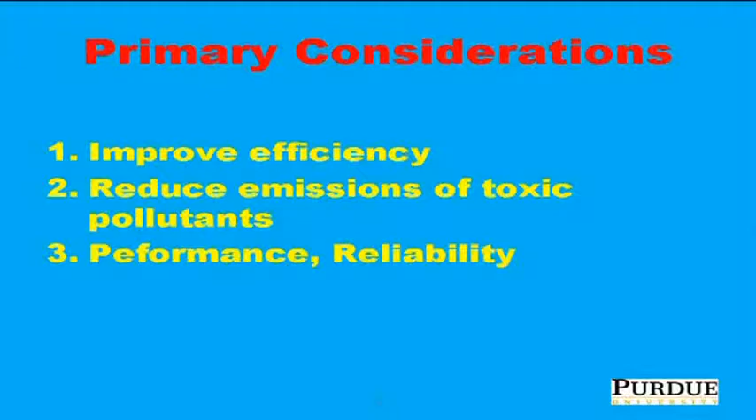So that question was in my mind as I formulated the presentation. It's going to change the tone a bit from what we have probably just heard. So when we design engines, the primary considerations obviously are to improve efficiency, reduce emissions of toxic pollutants, and of course maintain or improve performance and reliability. This we know.

Now, if I look at the range of engines we are interested in, that we employ for different applications, we can broadly classify them into spark ignition and compression ignition engines. And if I then look at the injectors and injection systems in these engines, I can classify them into low pressure, mid pressure, and high pressure.

So what I call low pressure would be, for example, port fuel injection, also multi-point fuel injection — they are the same thing. This is referring to a single cylinder, this is multiple cylinders. So this is typically what we have in our automotive car engines that we drive around.

Okay, low pressure. Mid pressure would be direct injection spark ignition engines. I will give you some pressure ranges in a few minutes as I go along. But mid pressure would be as those employed in direct injection spark ignition engines. They are not very common, but becoming perhaps more common in some operating regimes of automotive applications.

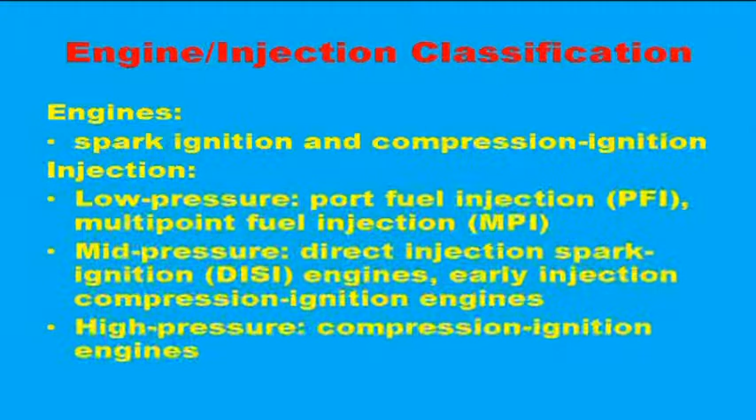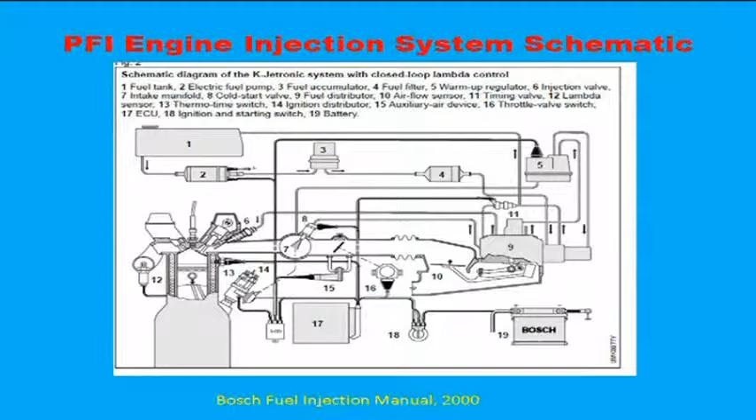The injection typically occurs when the valve is closed. So it is not as if it's spraying into the chamber directly — you spray typically when this is closed, and you wet the surface. Then the valve opens, airstream comes in, and so the process continues. What happens then is...

So when you inject, there is atomization occurring. There is probably secondary atomization occurring. But essentially, it wets these walls and wets the back of the valve. And when the valve opens and you have this airflow, probably there are different mechanisms that take place.

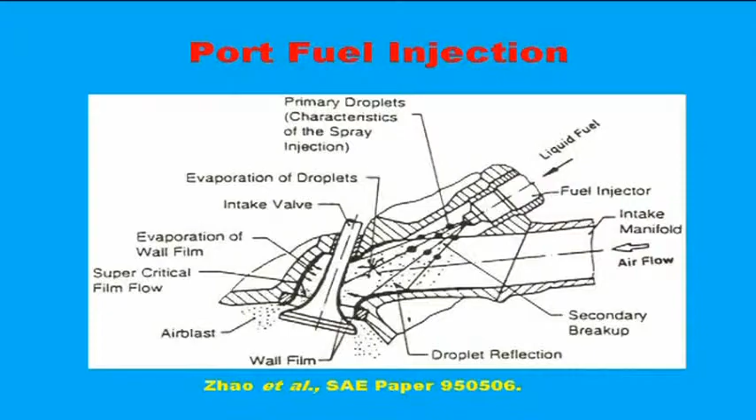One obviously is that it tends to vaporize if the engine is warm enough. If it's not warm enough, or even if it is warm, this airflow can actually strip droplets, and so you will have a mixture of vapor as well as drops that come into the chamber. That's how the port fuel injection works.

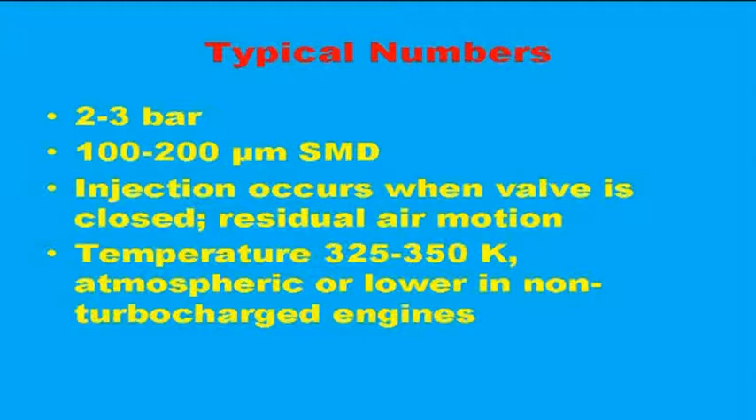Typical injection pressures for these are low pressure, 2 to 3 bar. If you measure the mean diameter of sprays from these kinds of injectors, they are typically reported to be 100 to 200 micron.

Injection occurs when the valve is closed. There might be just some residual air motion in the intake port at that time. The temperatures are typically 325 to 350 Kelvin, unless it's just the cold start period for the first couple of minutes. And the pressure in the port is, of course, atmospheric or lower in non-turbocharged engines.

The reason why you would employ port fuel injection is it allows you to give more accurate fuel metering. Because the injector is located closer to the engine as opposed to a carbureted engine where the fuel was introduced much further upstream, there is faster response.

You have improved volumetric efficiency because of the cooling in the intake port, and less vapor which actually displaces the air. Less cylinder to cylinder variation because each cylinder has its own port injection, and easier to adapt to alternative fuels.

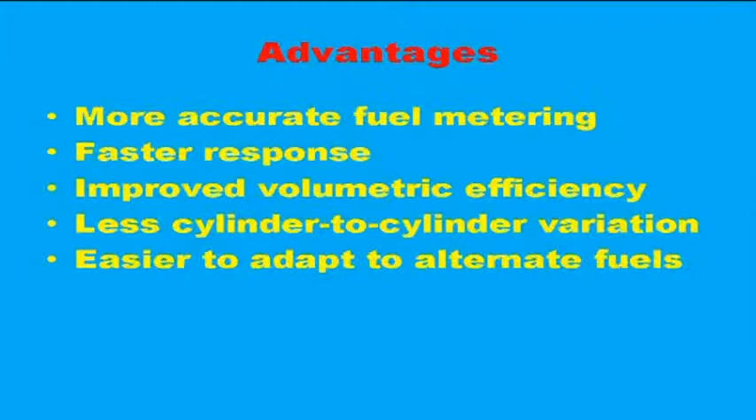Now note that in the case of port fuel injection, studying the atomization process of port fuel injectors is interesting, but not probably very useful. Those engines function well, but it's not a very useful effort. A presentation like this obviously has my opinions mixed in, and I will express those opinions.

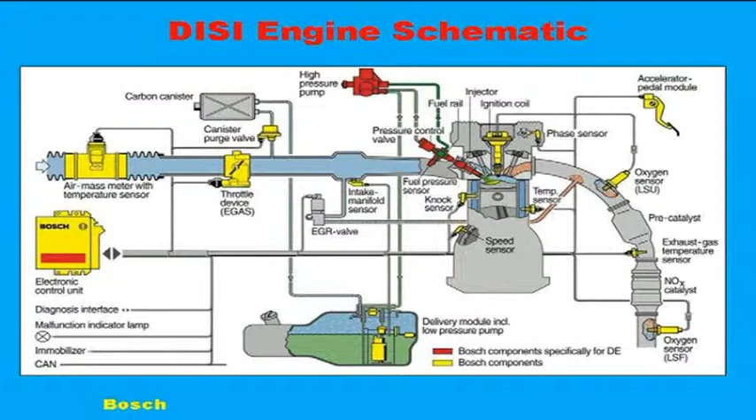In the case of the direct injection engine, whenever you hear the term direct injection, it's injecting directly into the cylinder. You have an injector which injects directly into the cylinder. That's just this part here. You can ignore the rest of it.

There are different ways of doing this. You can have an injector located here, which essentially sprays, and then the piston might have a contoured surface which allows the spray to turn around, and it then encounters the spark plug, which ignites the mixture, and it is burnt.

This spray is essentially guided to its position by the wall. You can also have the spray guided to its position by air motion within the cylinder, for example swirl. So then you would call it an air-guided system.

And you can have a spray-guided system where you can have an injector with, say, multiple holes, just as an example, and one of them might be directed right to the spark plug.

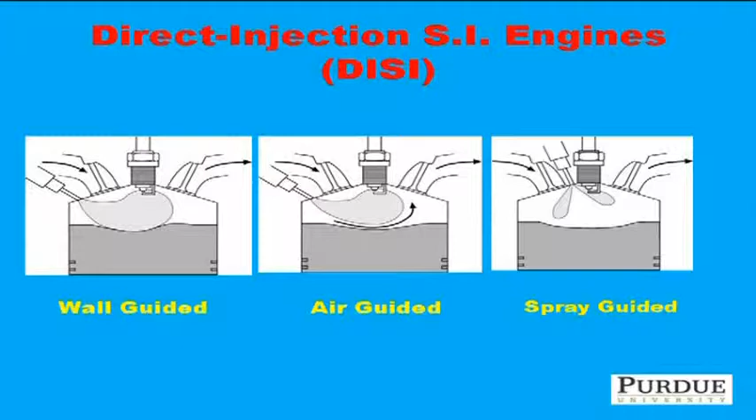In these engines, injection pressures typically range from 10 to 200 bar, and the range is fairly large only because the timing of injection changes depending on the mode of operation. The mean diameter has been reported to be 20 to 50 micron for these injectors, and injection can occur either when the piston is in its intake stroke or during compression.

If you are running the engine in the low to mid load range, injection typically occurs later in the compression stroke. This creates a stratified mixture, and the engine typically runs unthrottled in this case, so it can give you diesel-like efficiency. I mean, that would be the objective.

If you're running at high loads, injection is early, creating a homogeneous mixture. So there's a range of operation you can go through depending upon whether you want to run light load or high loads. The temperatures in the chamber during injection are typically 325 to 350 Kelvin, and again, the pressure can be atmospheric or lower in non-turbocharged engines.

Advantages and disadvantages: reduced pumping losses at light loads, higher compression ratios, overall lean burn at lighter load because you are essentially having a stratified mixture. Reduced heat loss at lighter loads because you do not have the combustion taking place close to the walls.

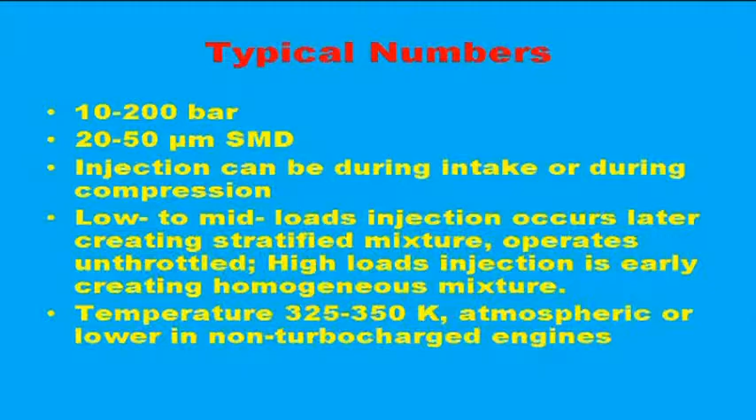But the negative is that because the mixture is stratified, you have richer regions, which can create increased hydrocarbon and carbon monoxide emissions. In fact, even if you have very lean regions, that can also produce unburned hydrocarbons and carbon monoxide emissions. So whenever you have stratified mixtures, this problem arises.

And of course, because the mixture is stratified, you can actually form soot. Particulate emissions become a problem as well. So it's emissions that sort of restrict more widespread adaptation of DISI concepts.

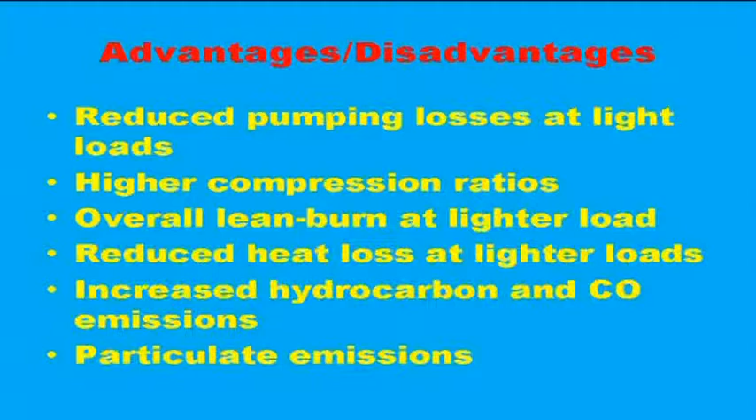Compression ignition engines - when you think of compression ignition engines, you think of diesel engines as an immediate example. But really, there are a range of modes of operation.

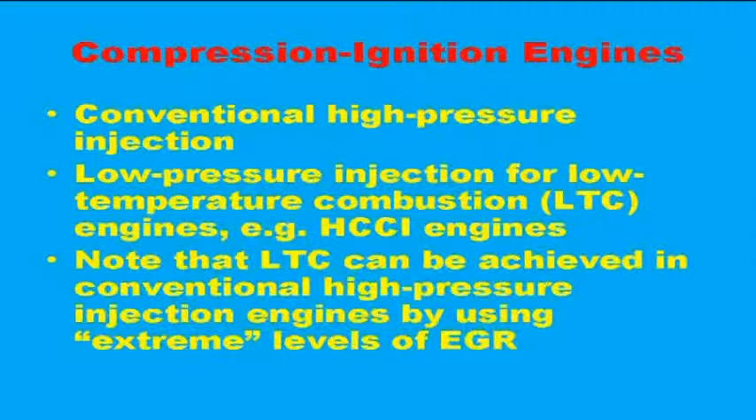So conventional high pressure injection, as in diesel engines, but you can also have low pressure injection for low temperature combustion engines, and an example of this is a homogeneous charge compression ignition engine, on which a lot of research is being done. Originally, when this was proposed, injection actually used to occur in the intake port, just like in a port fuel injected engine, and then it used to mix homogeneously.

Note that low temperature combustion of the type I'm talking about can be achieved in conventional high pressure injection engines by using extreme levels of exhaust gas recirculation too. That's another way to do that.

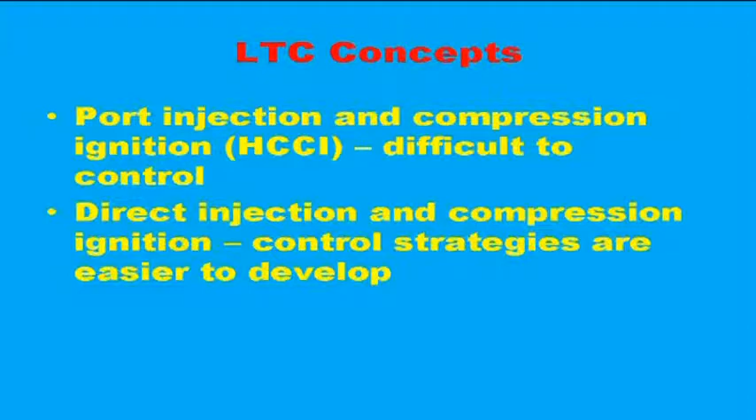Now, low temperature combustion concepts: port injection and compression ignition. The problem with injecting fuel into the port to create a homogeneous mixture and then compression ignition to ignite the fuel is that it's very difficult to control. Depending upon what load you are at, depending on transient operation, you don't have control over where exactly ignition will occur. And if ignition occurs too early or too late, it leads to loss in power.

If you have direct injection of the fuel into the cylinder and then compression ignition, control strategies are easier to develop. So here is a paper.

This is something I extracted from a paper by Huang et al. at Sandia. They have worked with this early injection, low temperature combustion concept, where essentially the fuel is injected early during the compression stroke. In fact, it could be injected even during the intake stroke, either using a hollow cone injector or just an 8-hole gasoline direct injector.

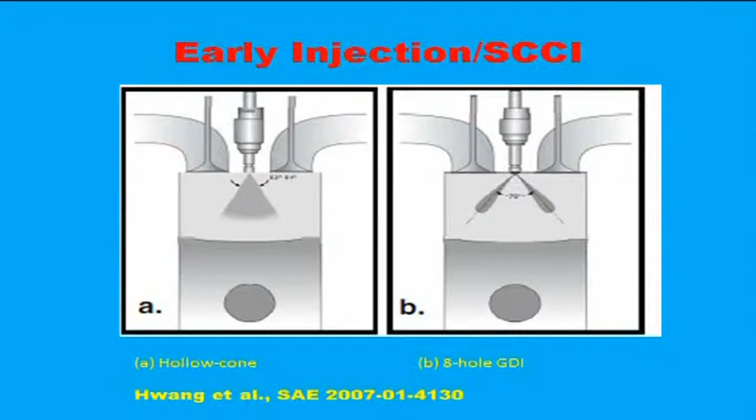And the idea here is, if you have a homogeneous charge, it's difficult to control it. But if you inject the fuel into the port, or if you inject the fuel early during the intake stroke, it becomes homogeneous. You can't then control when it is going to ignite.

So what do you do? You can actually inject the fuel during the compression stroke or later during the intake stroke, which creates a stratified fuel. And that then becomes easier to control because all the fuel will not burn simultaneously. So that's the essential idea.

So if you inject the fuel 40 crank angle degrees after the intake stroke begins, then by the time you reach top dead center, when combustion typically occurs, it is fairly homogeneous, right? You don't see much stratification.

On the other hand, if you inject it much later, say 315 crank angle degrees after intake port opens, which would translate to about 45 crank angle degrees before top dead center, then you have high levels of stratification.

So this stratification can be used to control the ignition process and the rate of pressure rise, and also control carbon monoxide and unburned hydrocarbon emissions. But as you change it from this condition to this condition, the injection pressures will change, and the atomization of the fuel will change, and so on.

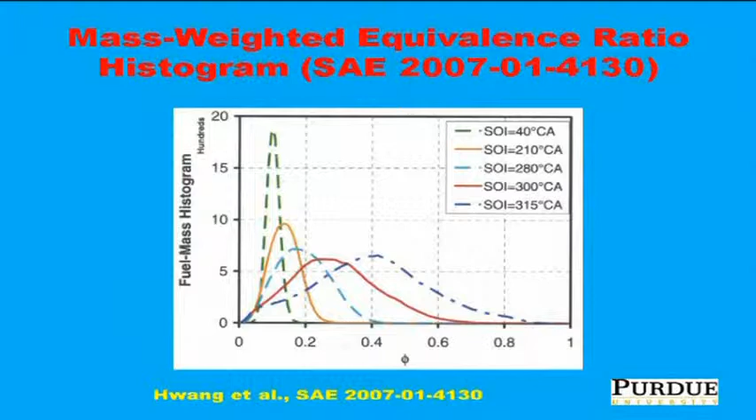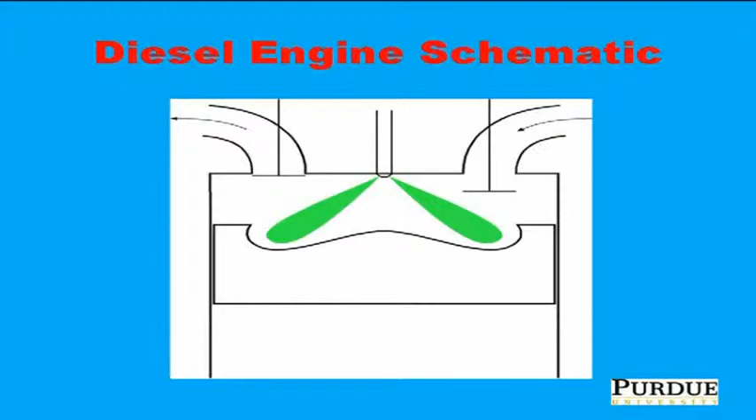Okay, so now let's come to the diesel engine. So the conventional arrangement would be you have a diesel injector, you have multiple sprays from a nozzle. It could be from 5 to 8, whatever. And you have a piston contoured in such a way to match with the shape of the spray.

This is actually a picture which probably has been reproduced more than any other picture in the world, but it shows you a combusting diesel jet. It appeared in a paper by John Dec, again from Sandia. What you see here is the structure of the jet. There are some features worth noting.

In this jet, this length here essentially indicates the length to which the liquid penetrates. Beyond that, there is no liquid. If you take this to be about 10, 11 centimeters, which would be half the bore, well less than the bore, but the distance from the injector to the wall, then this would typically be, depending on the size of the hole and other factors, maybe a centimeter to 2 centimeters. That's all it is. The rest of it is, so this is the liquid phase.

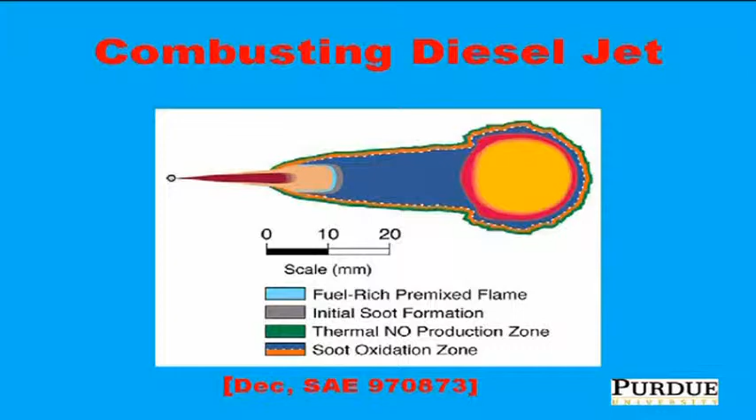And liquid phase means that's where you will see drops. A drop, so continuous liquid, we don't quite know exactly, but that's the liquid phase. The rest of it is vapor and it's burning. That's the region which is burning at high temperature, and that's the region where cooler reactions are taking place, which lead to the formation of soot precursors and ultimately to soot as well.

Now this is another picture I've taken from the paper of Idicheria and Pickett, also at Sandia. Much of this information from Sandia can be found at this ECN website that Pickett has put up. What you see here is an inject spray, and what they have done is they have Mie-scattering images of the liquid phase, and then this is Rayleigh measurements of the vapor phase.

Again, the point is being made here that if you look at the liquid phase, it tends to be fairly short. Note that this is actually in millimeters. So this length is about actually less than a centimeter for this particular injector, and then everything beyond that is essentially vapor.

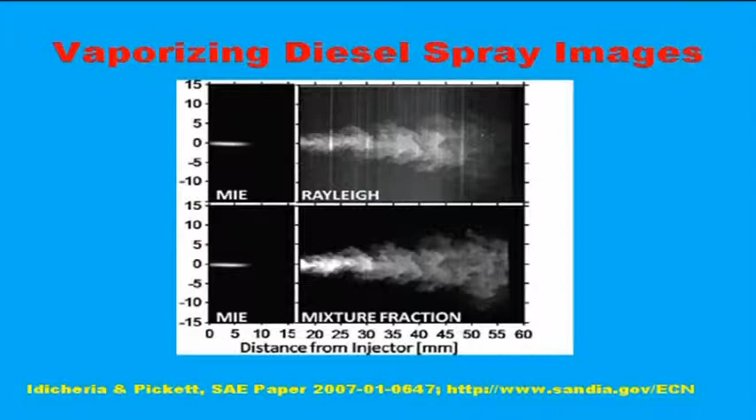Now, not only that - I don't have results here, but it has been shown through detailed experiments done at Sandia in the late 90s that this liquid length is controlled by the rate at which you entrain the hot air. So if you can actually entrain the hot air faster, that liquid length will become shorter. This is important because we spend a lot of time thinking about what the drop size should be.

The drop sizes are so small that it doesn't make a difference. It is controlled by how fast you can actually entrain the air. If you entrain it faster somehow, you can make it shorter.

Now I have to talk about modeling a bit. CFD modeling is increasingly employed to design and optimize engines. Models for sprays is an important component of CFD models.

Atomization, primary and secondary, are of course important elements of these. Another important component of this is wall interactions, because in engines there will always be interaction of the jet with the wall - not necessarily the liquid, but of the jet with the wall. And drops are likely to interact among themselves. And of course, initially you're injecting liquid, so you have to transfer heat, mass, and momentum.

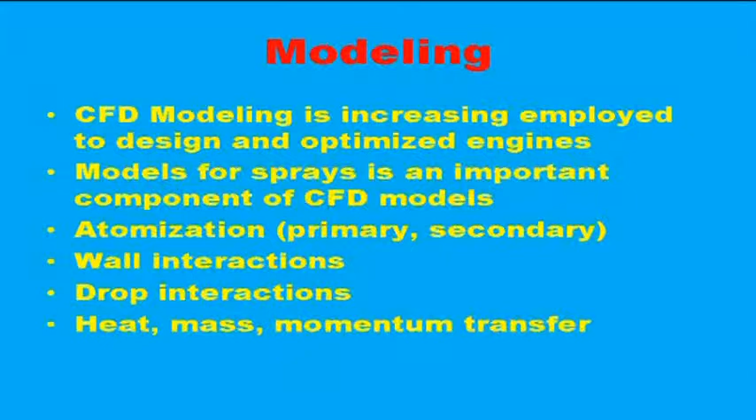So from the gas to the liquid and so on. Okay, so all these are important things to model. In the case of high pressure injection, as in diesel engines, it is my contention - it is interesting to know, it is useful to know, it is exciting to know how atomization takes place.

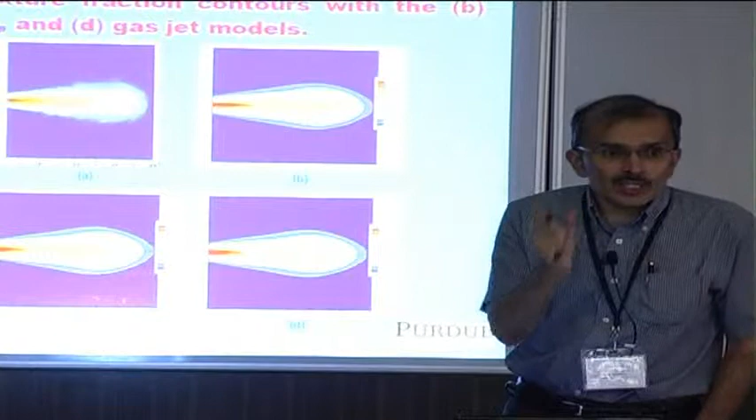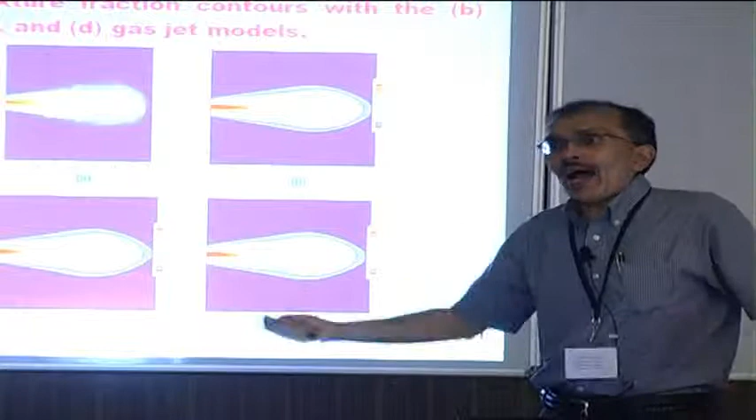I don't think we know, but it is not going to make a very useful contribution to engine design, because if you remember what I said before, the length of that liquid is fairly short. And that length is not controlled by what your drop sizes are as a result of atomization, but really by how much or how fast you can entrain the hot air to vaporize whatever drops are formed.

In fact, this is from a paper that Pickett and I have in Atomization and Sprays in 2010. He had actually measured - this is the same spray which I showed earlier, Idicheria and Pickett - where they had measured the liquid length as well as the spray characteristics, and also quantitatively measured the distribution of vapor fuel in the jet.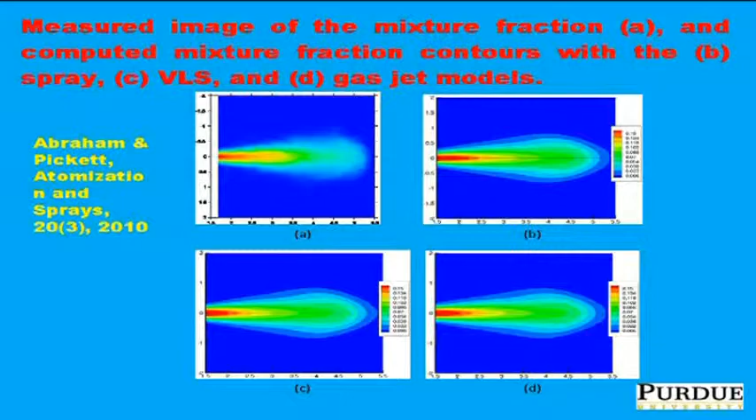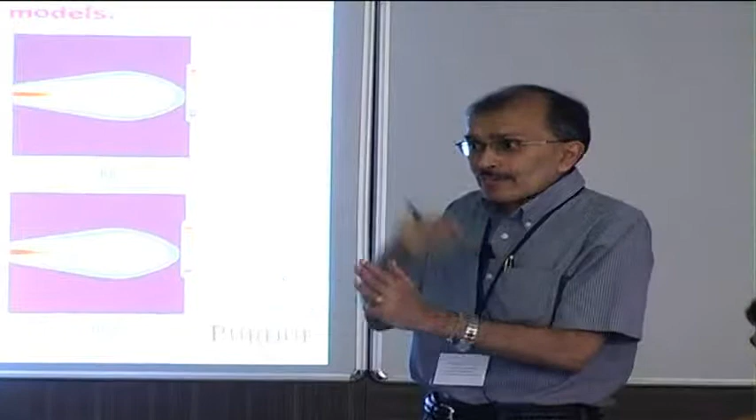And what we have found is that we can actually reproduce all the features of that diesel spray either by using a spray model - this is essentially a virtual liquid source, I won't get into that - or else a vapor jet model. In fact, you can assume that you're just injecting a vapor jet with the same mass and momentum as the liquid, and you will be able to reproduce it just as well.

So here are some actual calculations that we did. This shows mixture fraction as a function of axial distance in the spray, with vapor jet, actual spray model, and experimental results shown together.

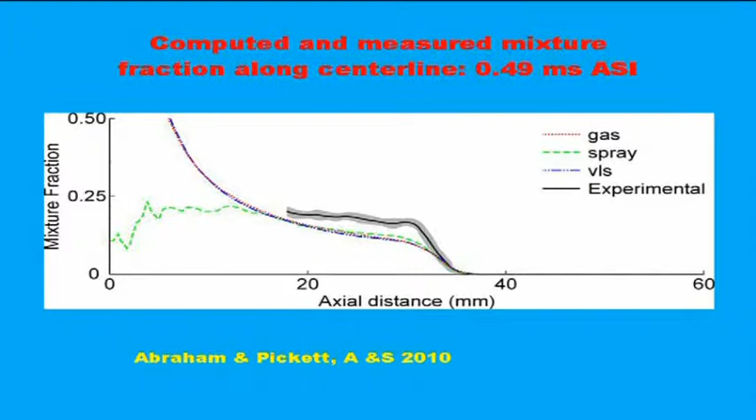This is a transient case, 0.49 milliseconds after start of injection, using a RANS simulation, which tends to disperse, and that's essentially why it doesn't capture that head region very well. But further along, it does a better job of reproducing the experimental results, and further still, it does even better.

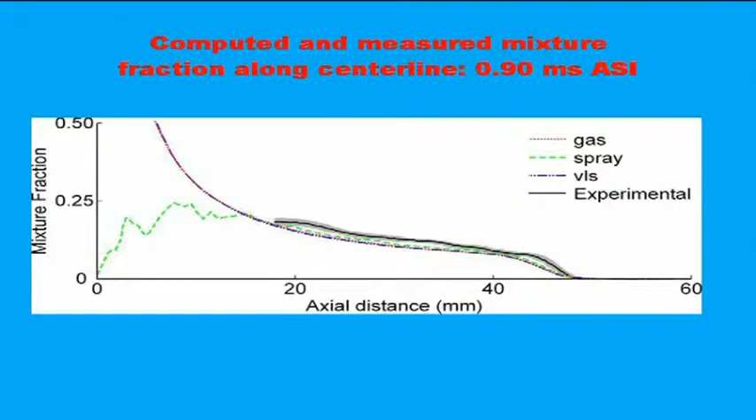But this is within the spray. Radially, we're looking at the mixture fraction, which in this case you can take to be the same as the mass fraction of the vapor fuel. If you look at the distribution, this is probably as good as you can do it—whether with the spray or the vapor jet, you essentially get the same result.

Note that in this case, the computed results are all a bit more spread than the actual experimental results, and that's because of the K-epsilon turbulence model, which tends to overpredict the spreading a bit. I have several of these results, but let me skip ahead.

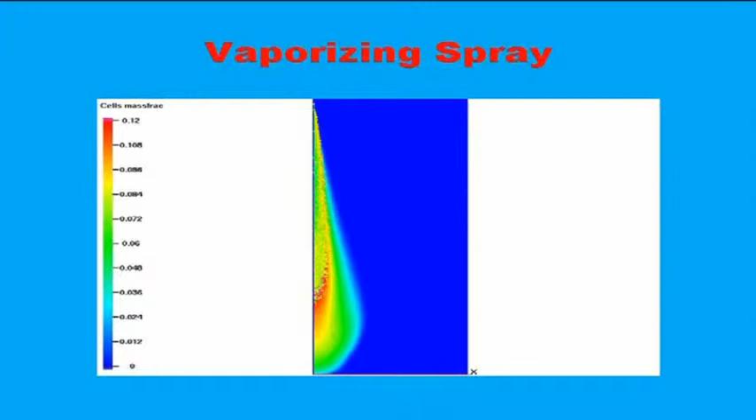Another problem with computing this vaporizing spray is that typically what we employ is a Lagrangian drop, Eulerian fluid model. That model makes certain assumptions—for example, it assumes that the drops are uniformly distributed in a computational cell.

At the same time, the model requires that a computational cell should not have greater than a certain percentage of liquid. So there's a bit of a problem, because near the orifice through which you're injecting the liquid fuel, you're not able to resolve that region properly—so you have to use a grid larger than the orifice size. That's a constraint of these models.

This is as good as you can actually get. This is an experimental spray we were trying to reproduce—I believe it's one of Jeff Naber's sprays from Sandia when he was there. With these constraints, typically you can use a grid size about 2 to 2.5 times the orifice diameter in these Lagrangian drop calculations. This is from Jeff Naber's paper, comparing computed and measured spray penetration.

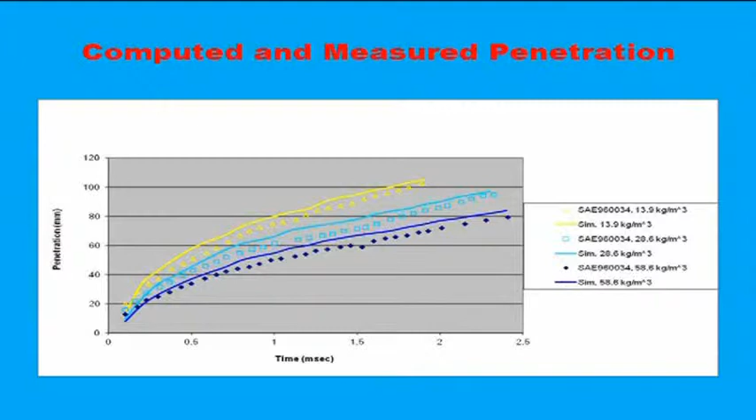It's within about 10 to 20 percent agreement. But that disagreement is primarily because you cannot numerically resolve the near-orifice region. If you can come up with a spray model that better captures that near-orifice region numerically, you can get even better agreement with experimental results.

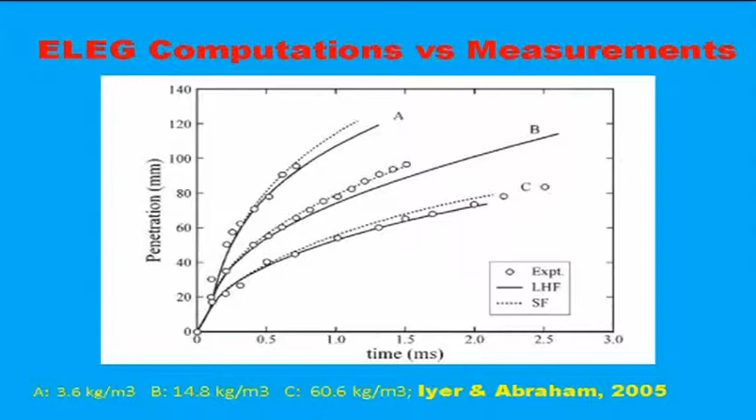These circles are actual experimental results, again from the same paper by Naber and Siebers. These are computations using an Eulerian liquid, Eulerian gas two-fluid model, which allows you to use very high resolution.

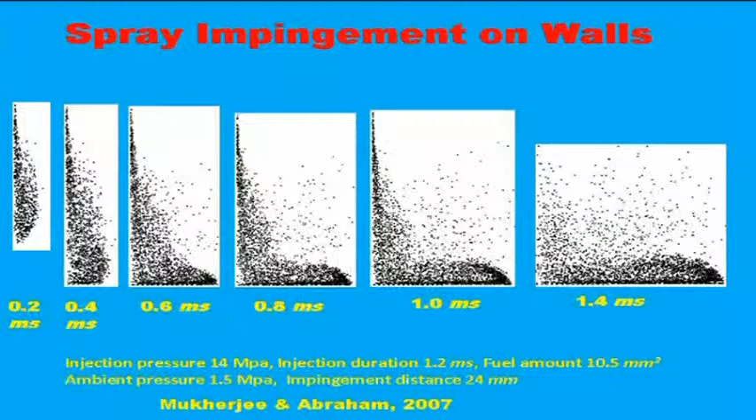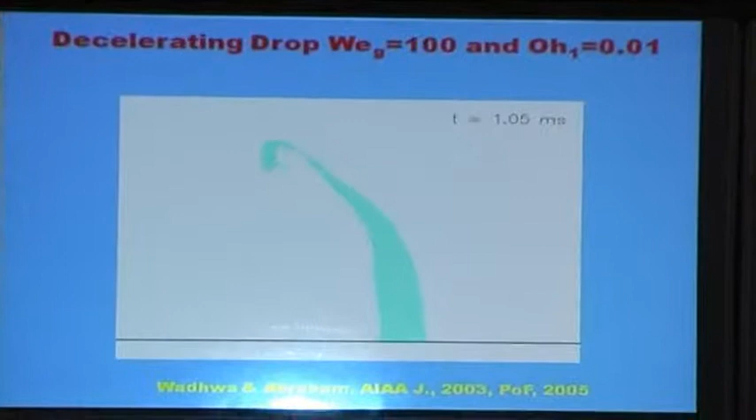There's a lot of work on individual droplets and trying to relate it to sprays, and this is interesting. For example, here we looked at a single droplet in a spray and asked, if this drop is subjected to this airflow, what does it actually do? We've done a series of these simulations, but this one is from some years ago.

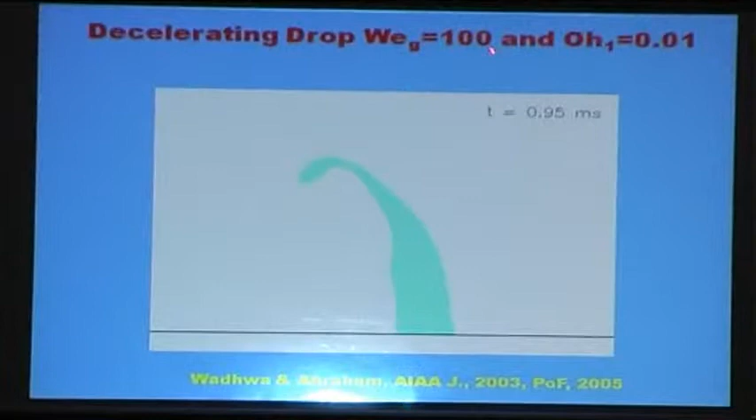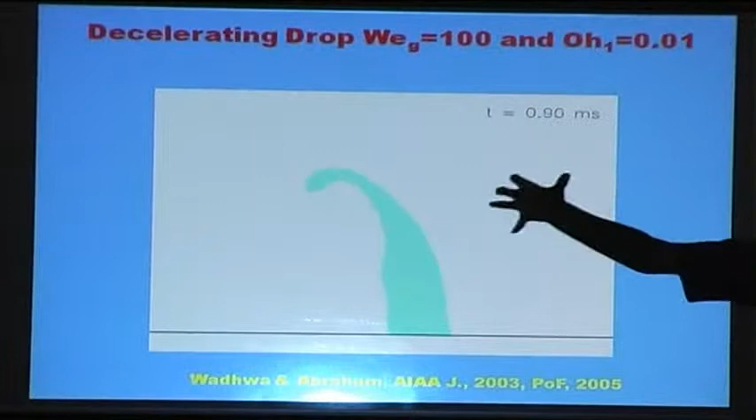For a certain Weber number and Ohnesorge number, what you see here is that this drop is highly deformed, and that contributes to the transfer of momentum, heat, and mass. Typically, in our Lagrangian drop Eulerian fluid models, we assume the drop to be spherical, so again, there is a problem.

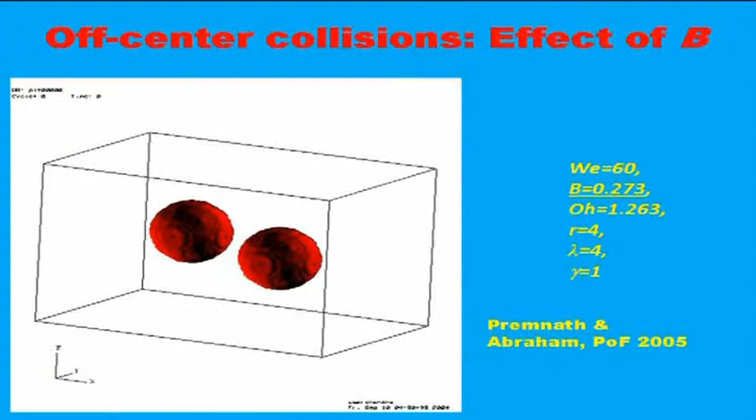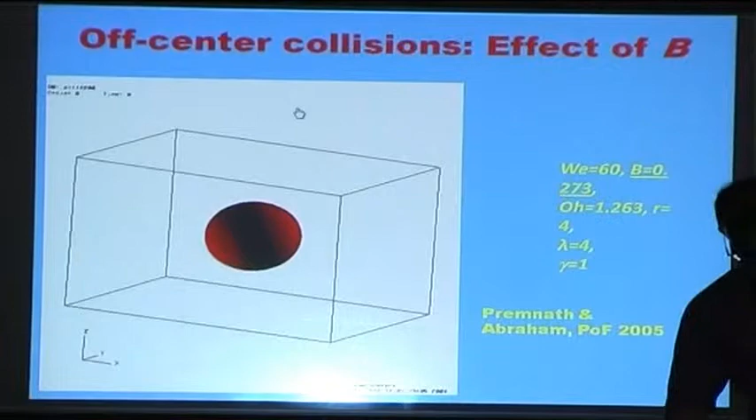And of course, collisions—very often we find that if you just leave out the effect of collisions, your spray models will do a better job than if you actually include them. Now, I want to summarize this.

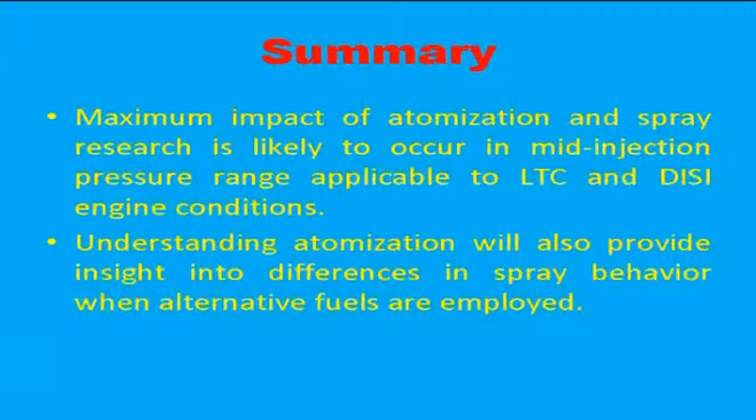So with all this, the maximum impact of atomization and spray research in the IC engines area is likely to occur in mid-injection pressure range applicable to low temperature combustion and DISI engine conditions, not in diesel engines or port fuel injection. I think it's good to know, but not very useful in my opinion.

Understanding atomization will also provide insight into differences in spray behavior when alternative fuels are employed. I think that's something interesting to do.

And so here, for example, is a case where we were trying to compute spray injection into an engine, and we were actually trying to compare this with some experiments that, in fact, the same experiments that I showed earlier by Huang et al. And this is fairly low density, not like a diesel engine.

Injection is fairly early during the compression stroke. And so what happens is the spray tends to penetrate a lot more, and there tends to be interaction with the wall. What is shown here is just the vapor fuel, by the way. But the liquid actually interacts with the wall.

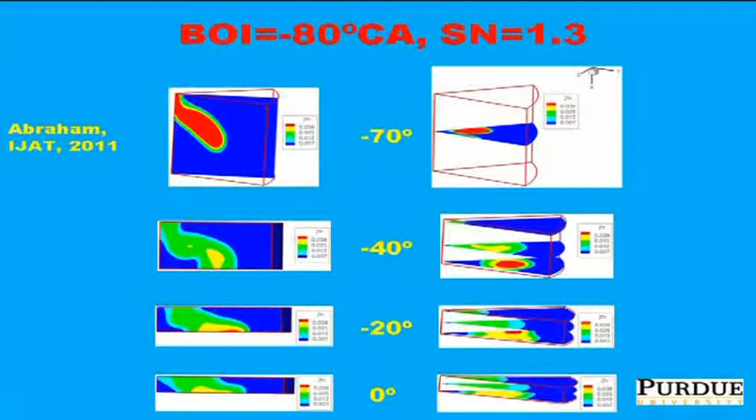And so in a situation like this, where we are trying to model this, I think there are a lot of unknowns which it would be good to know. What is the mechanism of atomization? How does the spray interact with the wall? And that would then help us to improve better engines in this mode of operation.

I had something on biofuels, but it's essentially properties of different fuels, and they can be different, and this can, of course, have an impact on atomization. And I think from the point of view of engines, this is also useful to know.

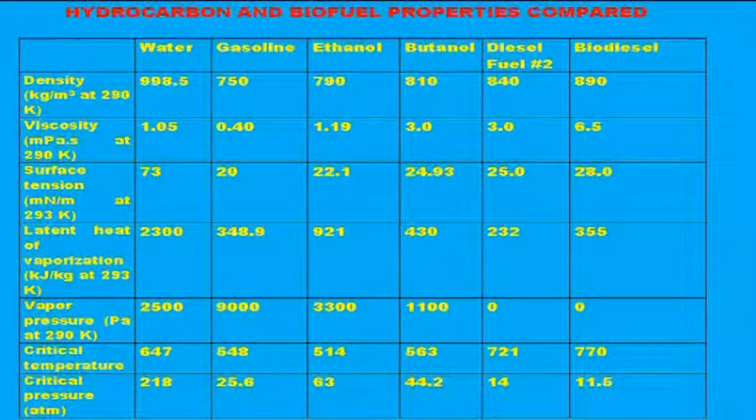In the port fuel injectors, although you say the spray studies will not be very much essential with respect to droplet size, but with respect to spray cone angle or with respect to penetration, because finally most of the sprays actually impinge into the manifold. Yes, to know where it is targeting - so those kind of studies may be useful, like penetration studies and cone angle for sprays, and also impingement studies with respect to sprays will be possibly useful, if not the droplet size measurement as such.

And with respect to the diesel engines, so what you are saying is using a gas jet, particularly for high pressure diesel sprays, using a vapor jet is sufficient, without bothering about whatever else. Yes. Okay, thank you.

With respect to the first question, I have my doubts that there is a whole lot we can gain from what we know today, or we can improve engines from where we are today by focusing on those targeting and all those things. I think that as far as the diesel engine is concerned, the vapor jet, yes. But there is one caveat though: in cold start diesel engines, when you're operating cold start, the conditions in the chamber are lower density, lower temperature. So in those engines, it is possible - in fact likely - that the liquid will penetrate much longer than this. So I said all those things, but we have to keep that caveat in mind.